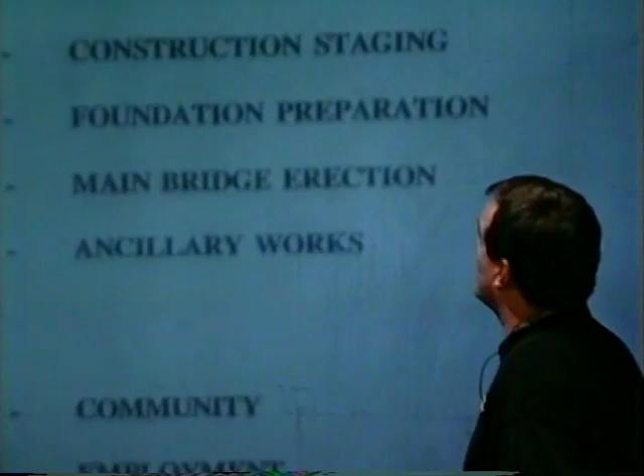In order to do that, I'm going to walk you through the criteria the Government of Canada provided for us that we had to meet in order for this project even to become a reality. I'm going to talk a little bit about our project team, a group of experts, specialists, and established organizations that we brought on board to put the proposal together.

The design solution, how did we get to it? Today we're saying this is the bridge, this is what we're going to build. What did we go through to come up with a bridge, as well as to widen out a tunnel?

The design verification: no matter how many experts you've got on board and how many checks and balances you have, as we've heard at a number of the public meetings, there's also a need to have checks and balances within a group of experts, and I'll walk you through that. Then I'll show you what the design features are of the bridge that we're going to build, that we're going to operate for 35 years, and hand it over to the Government of Canada, in new condition, for them to own and operate it for the remainder of its lifetime, which is a minimum of another 65 years.

A lot of people are interested in how do you build a bridge across that water. People that are used to the area look at the water as being something that is always under changing weather conditions. How are we going to deal with that? How do we deal with where we're going to build it from, the construction staging?

We're going to touch on those things, as well as a key concern for many: how much of that strait we're going to dredge, and what kind of impact we'll have on the valuable fishing community in Northumberland Strait. We'll walk you through how we plan on building this bridge and how it ties into the environmental concerns of where it has to be built, and then touch on the ancillary works associated with the main bridge over water.

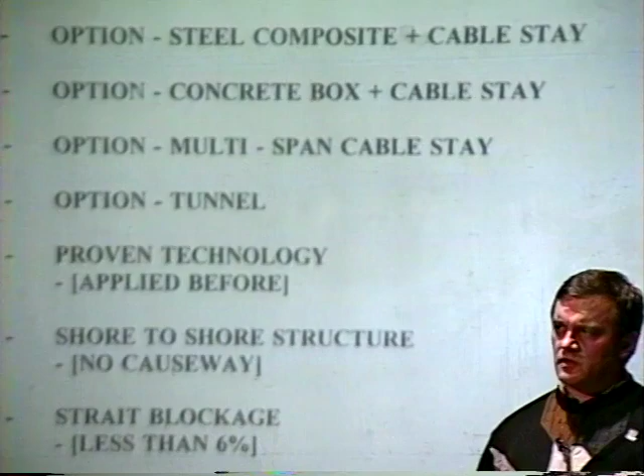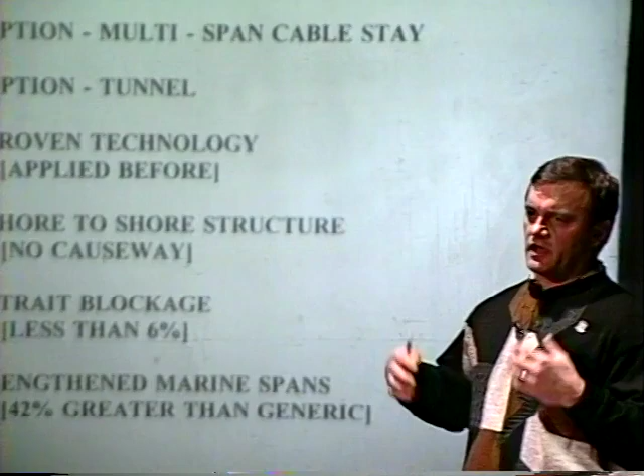In order to accomplish a long life for this project, one of the things you have to concentrate on is building it right the first time. The best way of ensuring that you're going to build it right the first time is to make sure that whatever design solutions you come up with are constructible, that they're easy to build. If they're easy to build, there's a good chance everybody's going to do it right the first time.

In order to come up with that solution you see over on the far screen, we did the following analysis of these options. We did enough preliminary design to understand what our needs were as far as volumes and quantities of material were concerned, and we did a costing on each one of these systems and eliminated all the ones you see on the right here to come up with what we call our best and final solution.

We studied a steel truss and cable stay bridge and priced it out, a steel composite and cable stay bridge, a concrete box and cable stay bridge, a multi-span cable stay bridge, and a tunnel. Those in the audience in the engineering field understand the technical difference between those, but I won't touch on that right now. If anybody has any questions, I'd gladly answer why we excluded the ones on this list and ended up with the bridge on the far left.

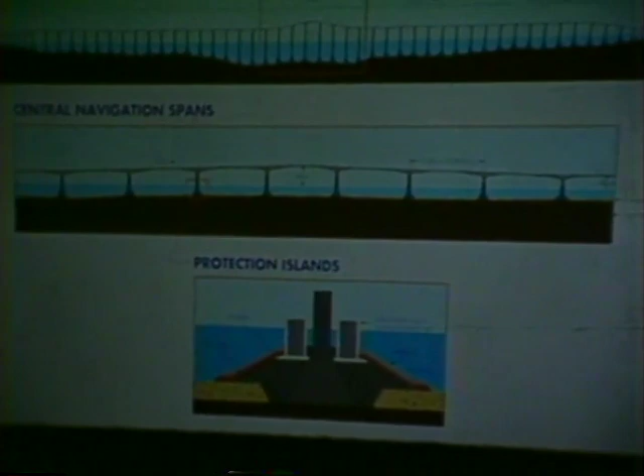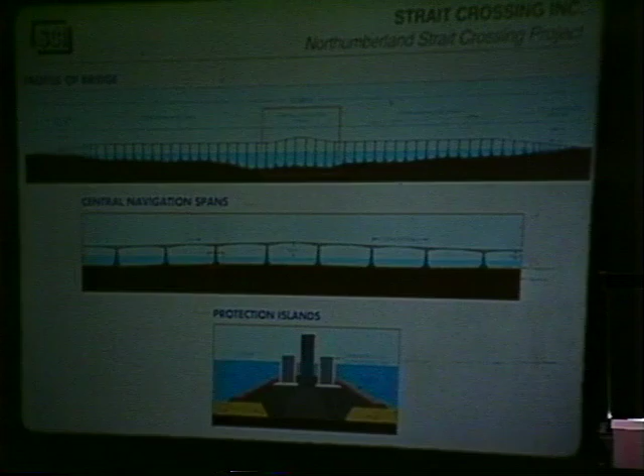Specifically with regard to the tunnel, the same thing: we were the ones that eliminated the tunnel option. Once we evaluated it, it was not the best option for the requirements of the Northumberland Strait. Contrary to what's been stated by a number of media, it was not the government of Canada that excluded the tunnel option as far as our proposal is concerned. We just didn't think it was as good as the solution we came up with.

The solution we came up with is based on proven technology. It's been applied before. The structure goes from the shore of PEI to the shore of New Brunswick.

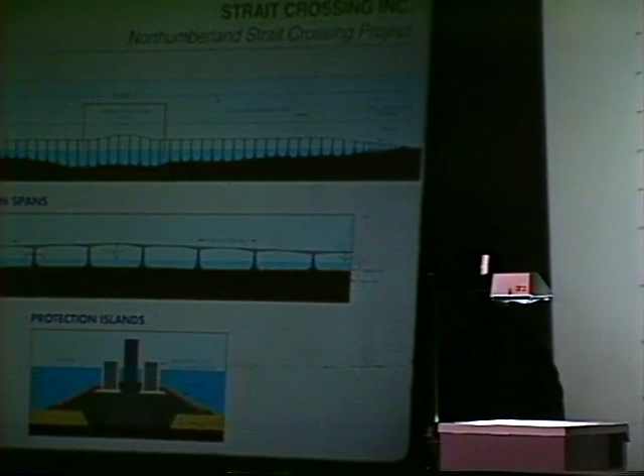There are no causeway sections. Each one of the abutments is on existing land, and the entire bridge is free from or above existing sea levels.

The bridge itself consists of 540 meters of approach bridges on PEI and 1,260 meters of approach bridges on the New Brunswick side. The difference between the approach bridges and what's in between, which we're going to call the main bridge, is that the approach bridges required a different design because the waters are so shallow that the marine lifting equipment we use for the main bridge couldn't get into the approach bridges.

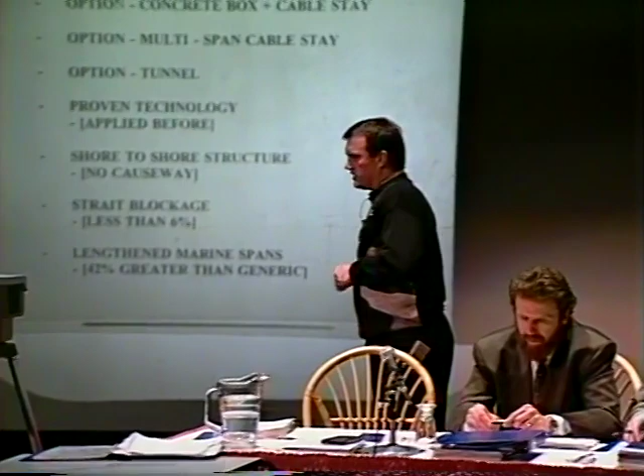The main bridge itself has 44 piers, 44 spans, each one of them 250 meters long, 250 meter span length, which is 42% greater than the span length that the FEARO panel reviewed when they looked at the generic bridge design.

One of FEARO's recommendations, to deal with concerns about ice out, was that although they thought it would be more costly, the span length should be increased. We have that in our final solution. It's 42% greater than the generic bridge.

Of key significance with these large spans is that we're able to reduce the strait blockage at the surface to less than 6%. At the pier foundation, where they sit on the seabed, it goes to 12%. They're cone-shaped foundations, and it increases the overall average to about 7.6% blockage of the strait, which is significantly less than the 10% blockage that the FEARO panel looked at and said would be satisfactory and have no effect on existing currents and tides.

In order to verify for the benefit of all interested parties that the designs are accurate, that they work, that they've been thought through, and that they covered all the requirements of where this bridge is going to live, the following design verification steps have been taken.

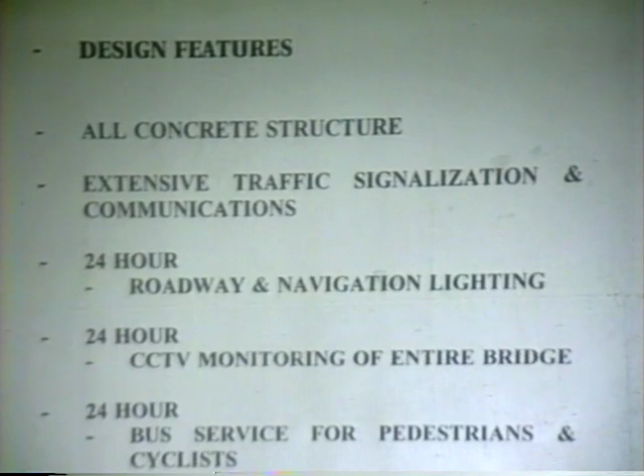The main design features of the bridge are listed on the overhead to your right. First, and very significant, it's an all-concrete structure. The significance of that is it's a low-maintenance structure, and especially in a marine environment, it's one of the best structures you can build from the standpoint of long-term maintenance and longevity. Because the people of Canada are going to take over this bridge 35 years from now and operate it for the rest of its life, the low-maintenance component of the structure is a very important design feature.

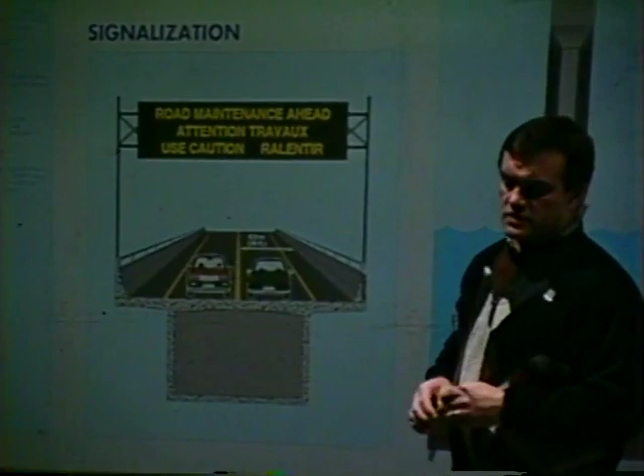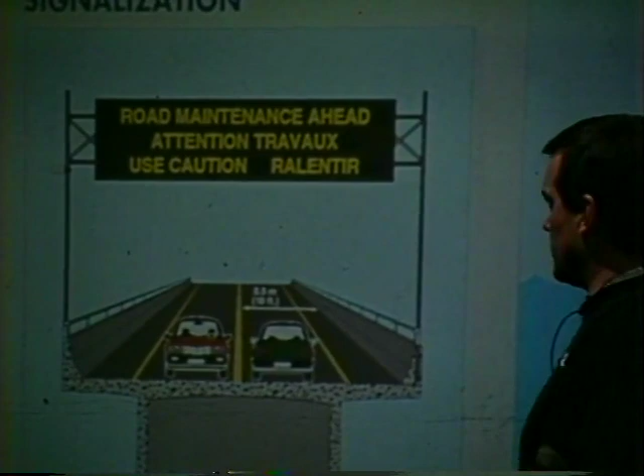Moving over to the people that are the users: the user of the bridge, you and I, are going to approach that bridge and see that there's extensive traffic signalization and communications. As you go across that bridge, you're never going to be alone, because the bridge has traffic signage electronically controlled from a control center stationed in Borden on a 24-hour basis. That control center will advise you what's up ahead of you, whether there's an accident, a stalled car, or the wind speeds occurring at any given time, because the bridge will be under 24-hour wind control.

Should you have a problem like a flat tire, every 500 meters there'll be a telephone along the bridge, so you'll never have to walk more than 250 meters to make a phone call to the emergency control center to send somebody out to help you. In addition, the entire bridge structure is on closed circuit television 24 hours a day, much like a security system in a bank building. That entire road surface is on television, monitored back to the same control center, and somebody's watching you all the time.

Should you have a problem, let's assume you run out of gas, as you're drifting off to the side of the road to pull off the driving lane, the person in the control center is going to know you've got the problem, but at the same time, you know you've got the problem.

And that's important for people to understand that you're never alone on that bridge, and somebody's always watching you. It's not a good place to go parking, or maybe it is a good place to go parking, I don't know.

With regard to pedestrians and cyclists, many people have asked this question in the past, but just to clarify, you are not allowed to walk across the bridge, and you're not allowed to pedal your bike across the bridge. But if you want to get to the other side, whether walking or pedaling your bike, there's a 24-hour bus service that will take you, and your bike, to the other side. The main reason for that, purely safety, we don't want people walking out on that bridge by themselves, so it's one of the requirements — you can't walk across that bridge.

In the event that you want to get to the other side but you don't like driving your car across because you just don't like driving over a bridge, we will, at your request, drive your car and you to the other side for you. That's something that will allow people who don't feel comfortable driving a bridge to get to the other side.

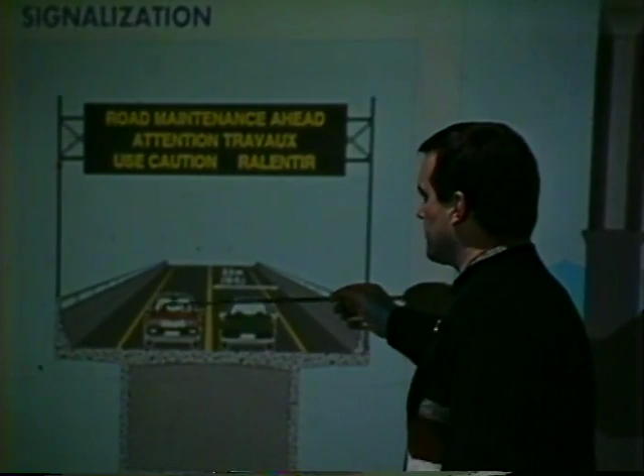Those escort vehicles will have boom safety equipment on them, so that in the event a truck jackknifes and starts leaking, you would put a boom across the front and the back of it, with the front vehicle and the back escort vehicle, and it will control the spillage within the confines of where the truck is spilling the fuel.

The only fuel that would end up in the strait is the small amount that would go through the drainage holes that are there at regular intervals for natural bridge drainage, and those will be manually closed after the accident happens.

We say 'in the unlikely event' because by controlling dangerous goods across that bridge, traveling at very low speeds, approximately 20 kilometers per hour, that particular journey for a vehicle carrying dangerous goods will be the safest journey in the entire highway system in Atlantic Canada. At 20 kilometers an hour, if there's a blowout of the vehicle's tires or something, it's going slow enough that the driver will be able to control the vehicle and not worry about jackknifing.

In that unlikely event that there is an accident with a truck of dangerous goods and it explodes and there's a fire, the fuel that's burning will burn off and not go into the strait. The people will get out of the way naturally, and the emergency vehicles, which are there 24 hours a day dedicated to the bridge, will be called out — they include jaws of life equipment as well as firefighting equipment.

The second part of the reason that this bridge doesn't ice the same way as normal bridges you're used to locally, where they say the bridge deck ices before the pavement ices, is because the bridge being so high above surrounding terrain is not affected by the differential temperature of this surface and the road surface, so it's up in that air high enough that it's relatively immune from that phenomenon. Where it's necessary to de-ice the bridge, de-icing salts will be used.

One area where a lot of people have mentioned concern in the past has been the fear of traveling so high above the water. So what we did for the benefit of everybody is a bridge height comparison, this being the MacKay Bridge in Halifax, this being our main bridge, and this being our navigation channel hump in the bridge that occurs in the middle of the bridge. To put it in perspective, when you're traveling across the MacKay Bridge, you're traveling at 52 meters above the water.

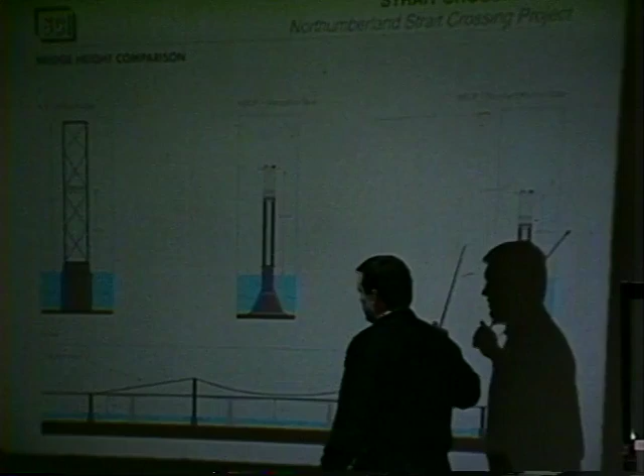Although the towers are higher, where the road surface is, that's 52 meters above the water, compared to when you're driving on the main bridge at 40 meters above the water, so you're actually 12 meters lower to the water surface than you are traveling across the MacKay Bridge.

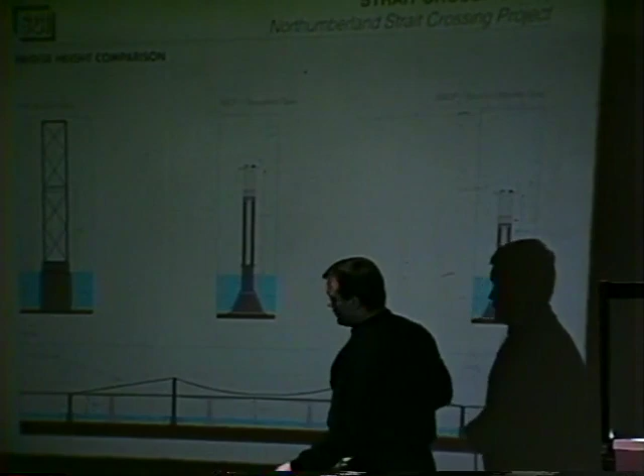However, when you go over the hump in the middle, you're traveling at 64 meters, so you're going to be traveling 12 meters higher than you travel across the MacKay Bridge. Anybody who's traveled across the MacKay Bridge and feels comfortable doing that is not going to notice the difference traveling across this bridge. However, a much more important reason of not seeing the effect of traveling at that height is the following. Go back one slide.

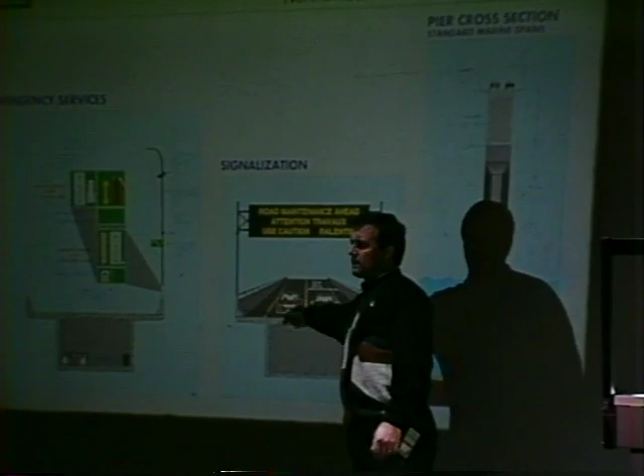For safety reasons, these concrete barriers are continuous along the entire length of the bridge, and they're at a height that if you're in a sports car or small car, you'll just see over the top of them if you look left or right, and you'll be looking into the horizon. If you're in a normal car, you'll see a little more of the horizon, but you won't be seeing the water. Once you get up to the size of a pickup truck and up, you'll be able to see not only the horizon but also the water in the distance.

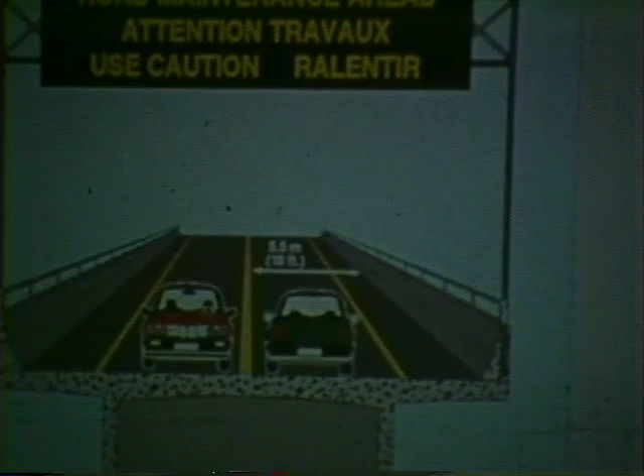Unlike the MacKay Bridge, there are emergency shoulders here, so you're further away from the edge. You're never going to get the feeling like you're looking straight down. So your sight lines, as far as looking left and right while traveling across that bridge in a car, are not very good as far as you can just see the horizon.

However, when you get to the top of the hump in the middle of the bridge, whether you're traveling from here to New Brunswick, you get up to the top and you'll be able to see 180 degrees of the New Brunswick shore from that vantage point as you start coming down the other side. So as long as you're looking ahead, you'll be able to see a very good panoramic view of either New Brunswick or PEI.

We think it's a very user-friendly bridge, and we stress again that you're never going to be alone on that bridge, and that's going to provide you a better safety environment traveling those 13 kilometers than any other 13 kilometers in the existing Atlantic Canada highway system.

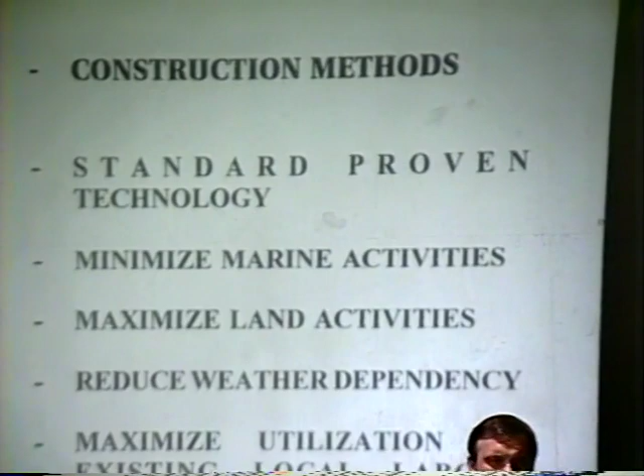A question before I leave drivability: a question came up at one of our meetings about whiteouts—what if you're out there in the winter and you get whiteouts? Simply put, whiteouts happen when the snow lying adjacent to a road surface gets blown up by winds and totally whites out the area in front of you.

Because this bridge is so high above—and this applies to ice too during the winter—the phenomena of whiteouts is going to occur a lot lower than the 40 meters above. So whiteouts in itself is not going to be a problem.

Monitoring has been done on a similar structure, similar in terms of its height, and which also had a causeway section—the Mackinac Bridge in Michigan. They had to close that bridge for whiteouts a few times in its 30-year life to date, but the whiteouts only occurred at the causeway section, because that's where the snow is allowed to pile up on the ice beside the causeway. We're high enough above it that we will not experience a whiteout problem.

Our construction methods are based on standard, proven technology. Everything we're doing up there has been done before. The only difference is some of the pieces are a little bigger than what's been moved around before, but all the work and methods we're using is proven standard technology. Our goal in developing our construction methods was to minimize our marine activities and maximize our land activities, to reduce as much as possible the construction schedule's dependency on weather.

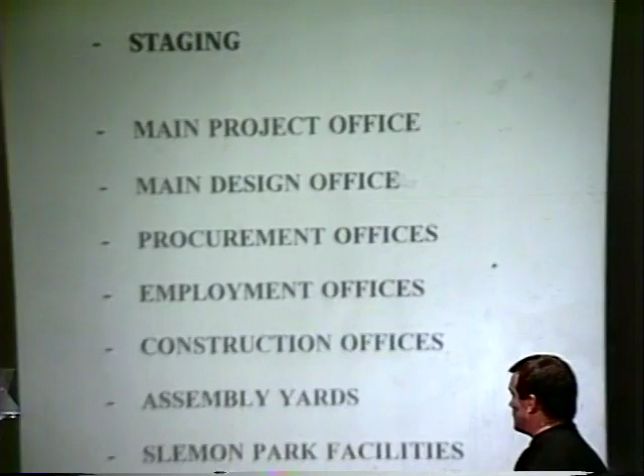The main project office is going to be Charlottetown—that's the corporate head office of Strait Crossing Consortium. The main design office is going to be in Moncton. The procurement and employment office will be duplicated in Moncton as well as in Charlottetown, and further duplicated at the construction office locations in Bayfield and in Borden.

So if you're looking for a job, it'll be relatively easy for you to get a job without having to travel too far. You won't have to travel off the island to apply for a job, and vice versa—somebody applying for a job on the mainland won't have to travel to the island to apply for a job.

With regard to assembly yards, the main assembly yard is going to be located in Borden, as well as another assembly yard at Bayfield. Slemon Park facilities will be used for training purposes, and the hangar facilities will be used for live mock-up training of different forming and rigging systems.

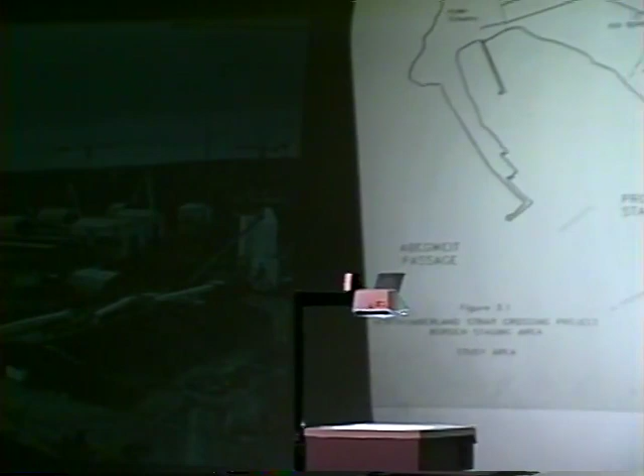For those familiar with the Borden area, this is the existing ferry terminal. That piece of land sticking out to the east, shaded here, is going to become our PEI staging area, the main staging area for construction of the main bridge. It's 150 acres of real estate.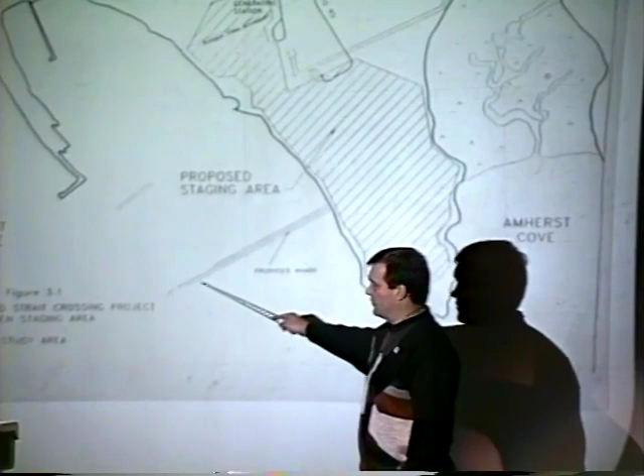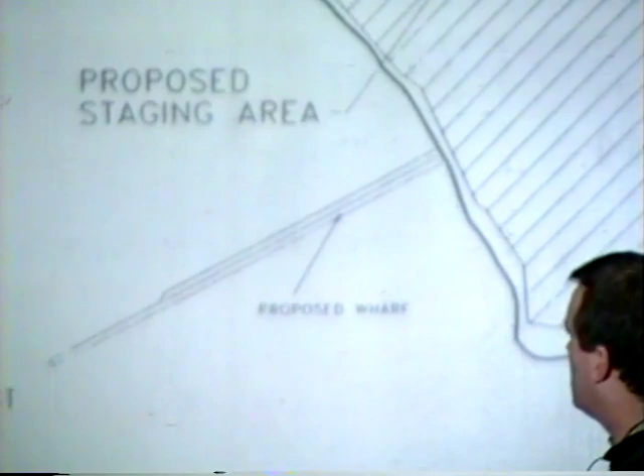We're going to be building a wharf to deep water. That wharf will include the ability to sink submerged barges to the sea bottom, so the barges are sitting on the sea bottom when they get loaded with the bridge components. This particular wharf requires approximately 150,000 cubic meters of rock fill.

Over here is where that wharf takes off into the water. This is an area where we're going to be fabricating what we call the pier bases. The pier shafts will be fabricated in this area. The main bridge girders will be fabricated in that assembly line, and the drop-in spans will be fabricated there, put into storage, and then moved from the storage area out to the barges. We'll talk about that in a moment.

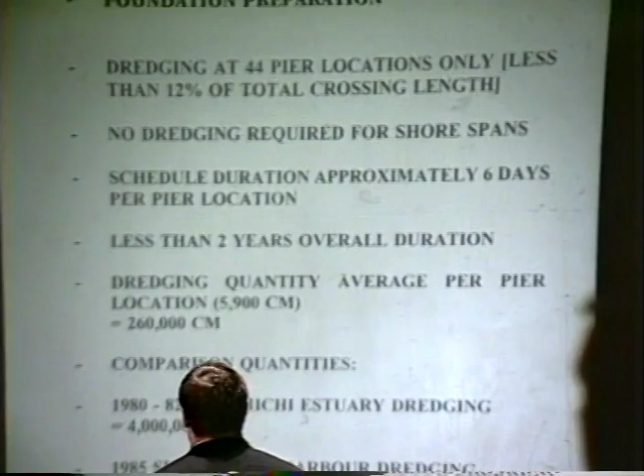In order to prepare the site for the project, for the segments themselves, we've got to prepare the foundations. Foundation preparation is the work that's required underwater and in a marine environment.

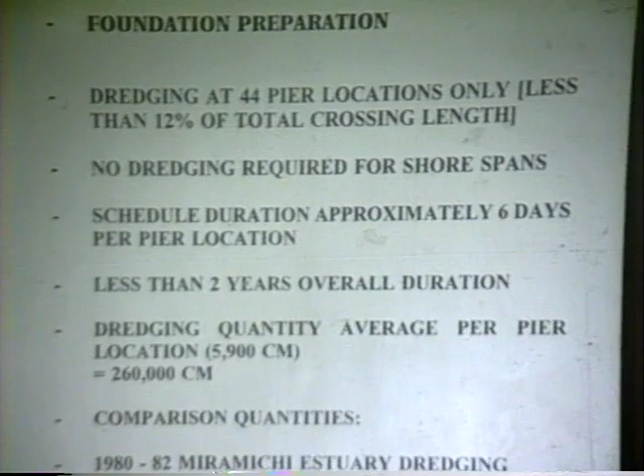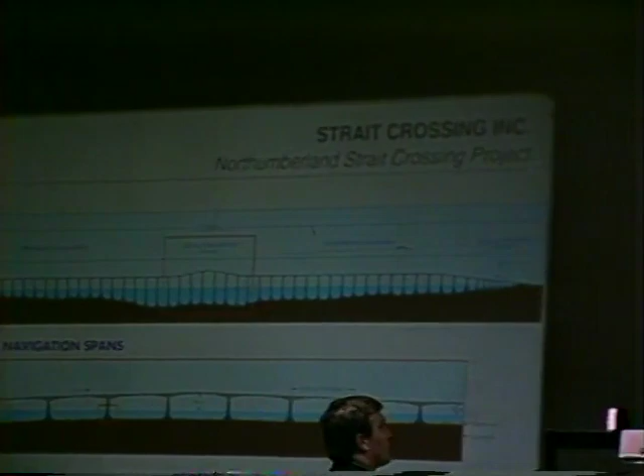In our solution, we need to dredge at only 44 pier locations, which from a distance standpoint represents less than 12% of the total distance across the strait. Our dredging starts at 540 meters offshore and ends up 1,260 meters from the New Brunswick shore. There's no dredging required for our approach bridges, because they're in such shallow water that they're going to be drilled piles rather than gravity-based structures.

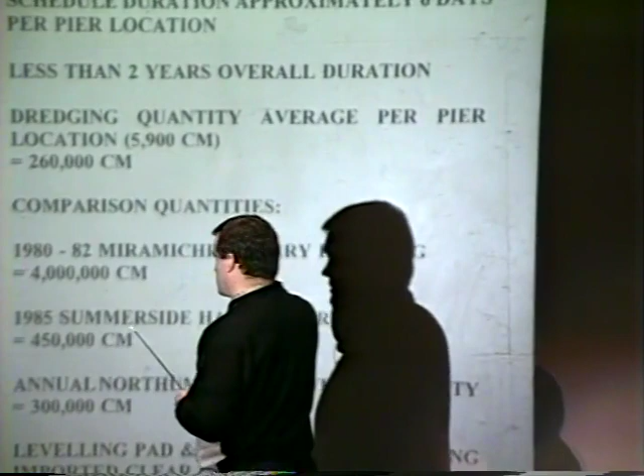The amount of time we expect to spend at each pier location is approximately, on average, 6 days, and we expect to finish the dredging in less than 2 years.

The dredging quantity on average is 5,900 cubic meters per pier location, for a total dredge volume of 260,000 cubic meters. That 260,000 cubic meters compares to the 300,000 cubic meter plus that the FEARO panel report reviewed with regard to the generic bridge, so this is an improvement over that as well.

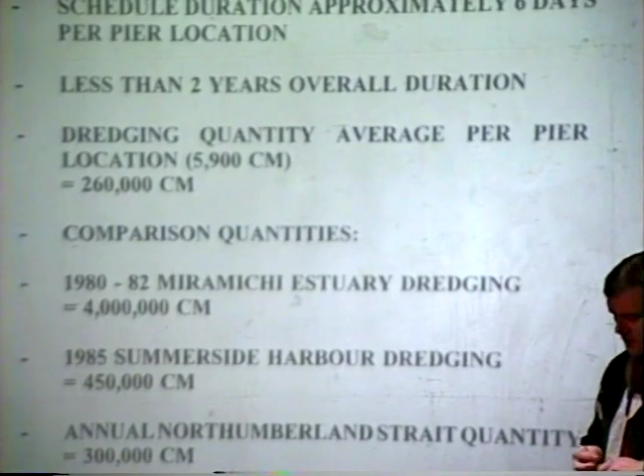The FEARO panel also concluded that with proper dredging techniques, the amount of sediment produced by this small quantity of dredging would not have a harmful effect on the marine environment.

To put 260,000 cubic meters of dredging in perspective, we gave some comparisons of quantities. Between 1980 and 1982, there was 4 million cubic meters of dredging in the Miramichi estuary. In 1985, the Summerside Harbour dredging, which happens on a regular basis, involved 450,000 cubic meters in one marine season alone, compared to our 260,000 over 2 years. The annual Northumberland quantity of maintenance dredging is 300,000 cubic meters per year.

This dredging is not spread over a total of 2 years, it's just a little over 1 year, so we'll be in there for 2 seasons, but not the full 2 seasons.

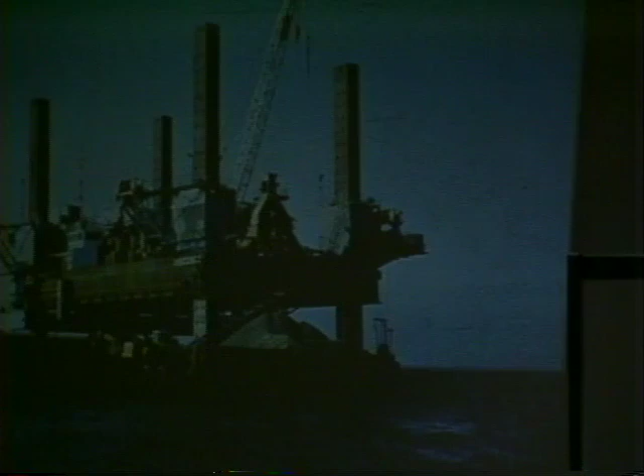Once the pier base is put in, the scour protection goes around it. All that material uses imported clear stone, so it will not have a negative effect on the environment around it.

I spoke earlier about minimizing the number of marine activities and maximizing the amount of land activities.

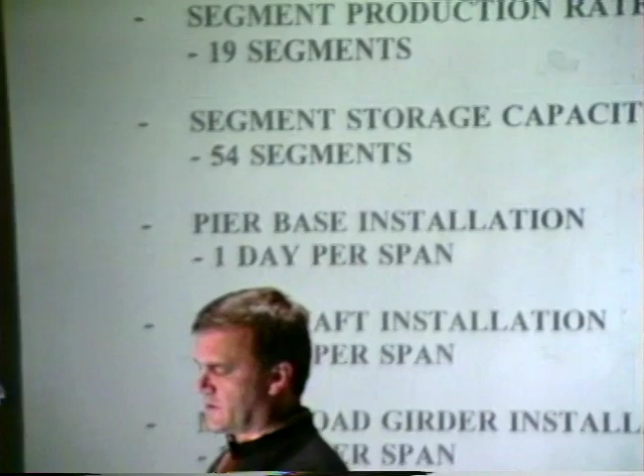The total project requires 427,000 cubic meters of concrete to be cast. With our design and construction method solution, of the total concrete placed on the entire project, approximately 20,000 cubic meters will be placed over the water during construction of the main bridge. A very small quantity of the total will be placed in the marine environment, and that concrete will be in the form of closure pours.

There will be very many pours where the pieces come together, and each one will be a very small quantity. The key significance is that in the unlikely event of a breakage in our concrete pump equipment or what have you, the amount of spillage will be very, very minimal. The concerns raised by people saying that during construction you run a great risk of damaging the natural marine habitat - we believe we've managed against that in the way we've developed our construction methods.

The entire main bridge only consists of a total of 183 bridge components. Those bridge components consist of a pier base, a pier shaft, a main road girder, and a drop-in road girder. I'll describe those in a moment.

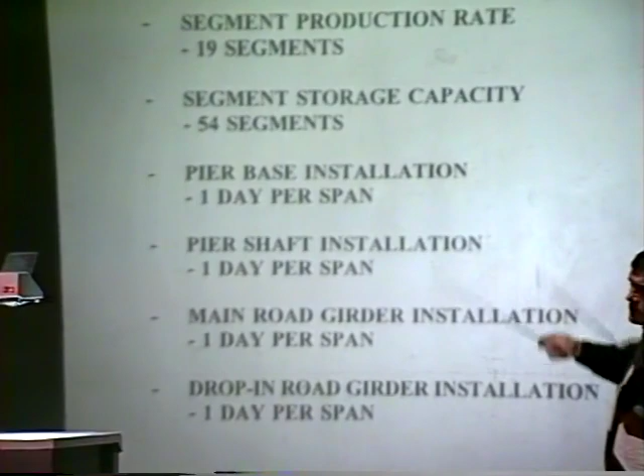To actually place one of those into their final position takes approximately one day. So in theory, you could finish that project in 183 days. Our analysis of existing wind and weather information in Northumberland Strait says that with our equipment, we have between 185 and 188 weather working days on the strait. So the amount of time we're going to spend on the strait equates to one marine season to put up the main bridge. It will not be built in one season because there are a lot of steps that go in between placing one piece and placing the next.

But we don't have the kind of storage capacity to build the entire bridge, store it, and then erect it. It will be built over 2.5 to 3 seasons. The point we want to stress is there's going to be very, very little work happening over the marine environment, and very little chance of affecting it.

At any given time in the staging area, there's going to be 19 segments under construction, and that will be the largest labor force of the entire project - in the production of these 19 segments.

In storage, there'll be storage capacity for 54 segments. So in the unlikely event that we get a long term of bad weather, we'll have sufficient storage capacity so that production of the units can continue while the marine equipment is waiting for better weather.

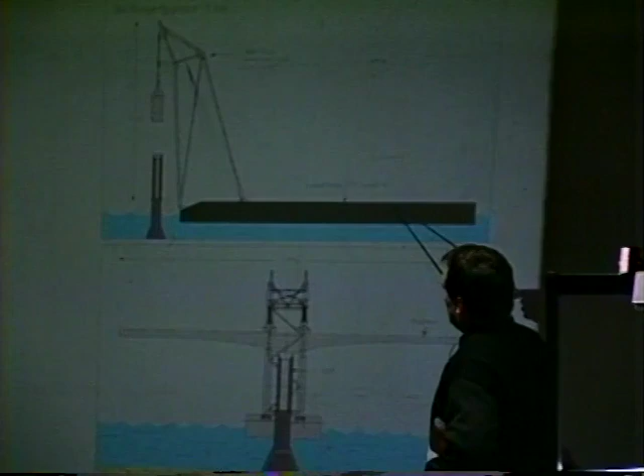Once we get out to where we want to place the pier base, we're going to have a barge or a crane mounted on a barge that's going to turn around and lift the pier base off the barge that brings it out, the load barge, and lower it into the sea.

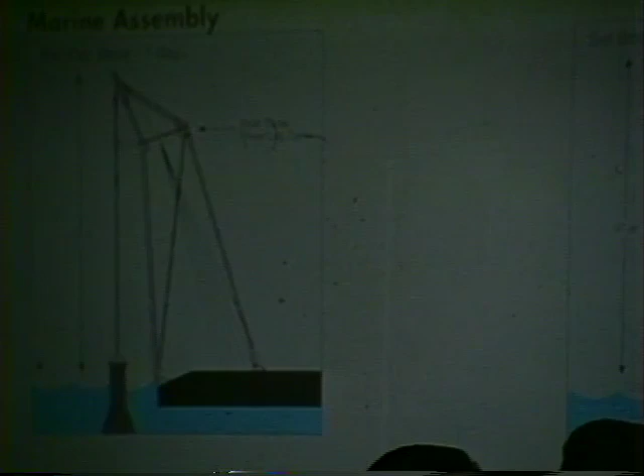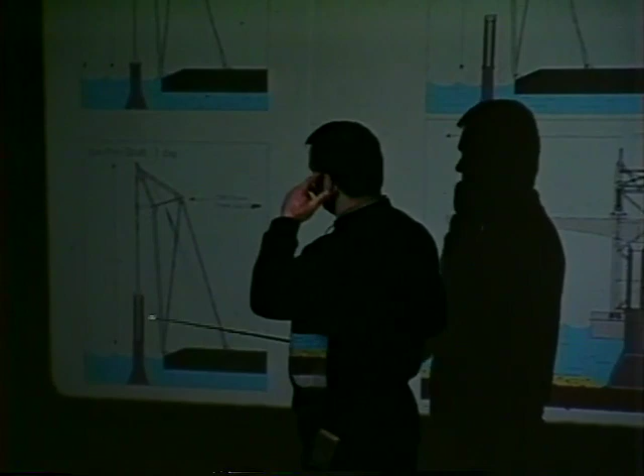These pier bases are of varying height so that when they get placed on the seabed, they'll always be sticking 5 meters out of the water. There'll be varying heights to account for the different sea floor elevation. The maximum height is approximately 150 feet, the equivalent of a 15 or 20-story building, that order of magnitude.

On top of that, we put the pier shaft. At the navigation channels, we have 2 of these to put into place. On top of that, to the top of the shaft, goes what we call the main span girder. The main span girder is 170 meters long, 50 feet high at its deepest point, and weighs 7,600 metric tons.

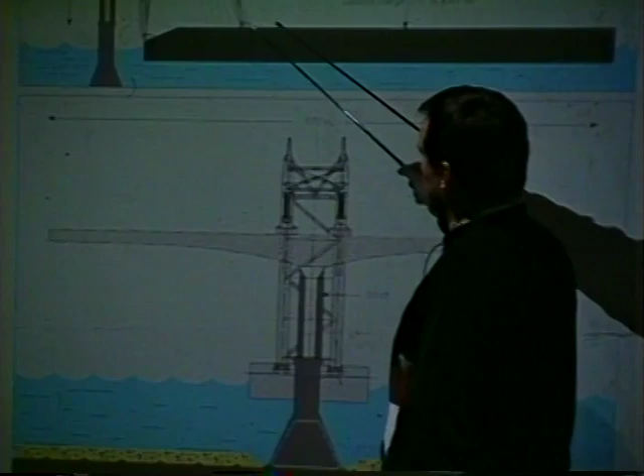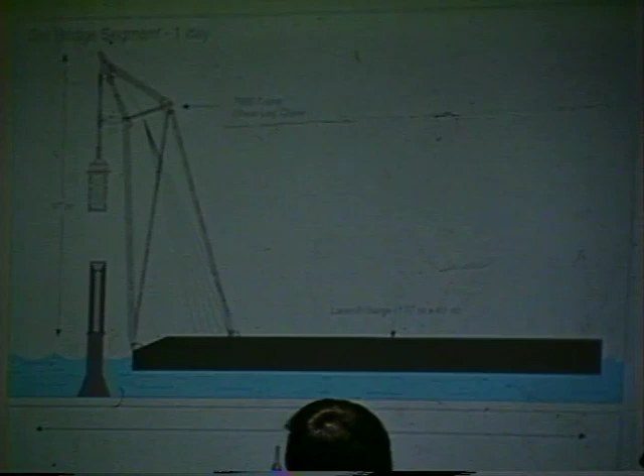This crane, mounted on this barge, from sea level to the top of the crane is the equivalent of a 35-story building. On a clear day, you will see that crane boom from many parts of the island. That crane has the ability to take that 7,600-ton piece of concrete and place it 62 meters in the air on top of the pier shaft.

Because this concrete base, when placed, ends up being 5 meters out of the water, there's no need for any underwater concreting. Again, we have reduced the interface between the marine environment and underwater concreting in that environment.

In conclusion, we think it's a pretty simple method of building a bridge. We're not going to be out there that long, and the things we're going to do out there are very clean as far as running the risk of spills, concrete equipment breaking down, and so on.

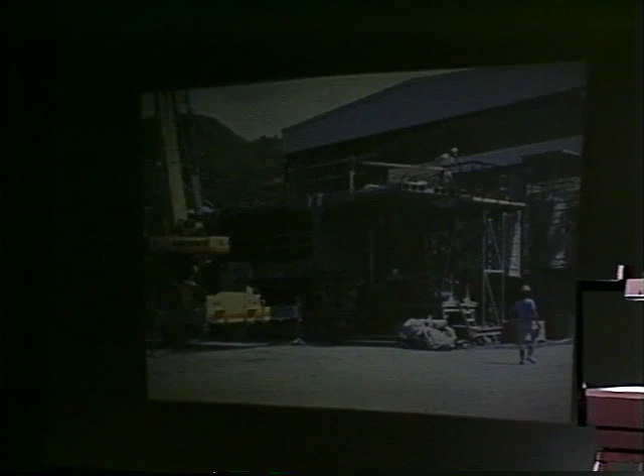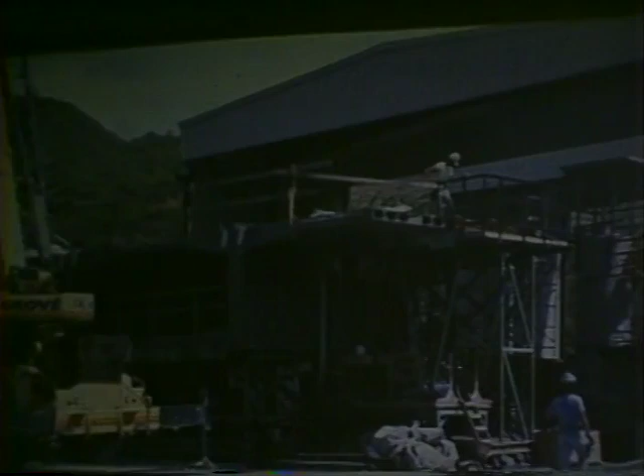Now once the piers are built, these are the units that get cast in the staging area, and then they get lifted onto the bridge from above using a launching truss.

Not working? That's too dark. Okay, sorry.

In addition to that, we're going to be building dangerous goods stations on both sides of the water, toll plazas, administration and maintenance facilities on the PEI side. Another ancillary work is there's an option to rebuild or replace the Hillsborough Bridge, which may be exercised by the government of PEI.

So what does all that mean and what impacts does it have on the community? Studies have been done and shown that in the long term there's going to be increased employment opportunities.

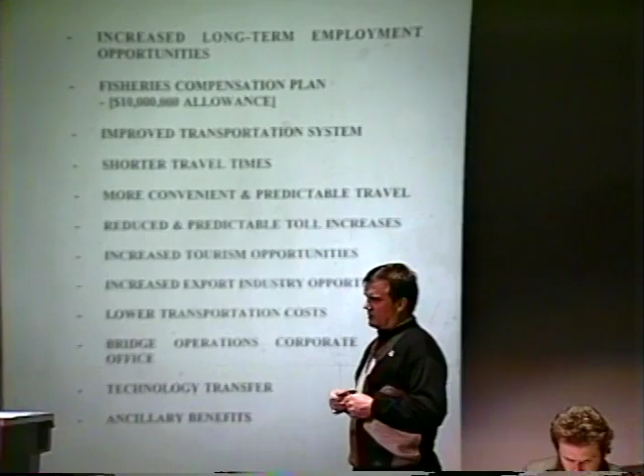The fishery community is going to be compensated through what's called the Fisheries Compensation Plan, administered by the Fishery Liaison Committee, a committee chaired by the Government of Canada and made up of representation from the fishing industry in the Northumberland Strait.

We're going to end up with a more improved transportation system, and that's going to result in lower transportation costs. It's going to result in increased export opportunities. It'll increase the size of the market area available to PEI businesses to compete in, and it'll come up with more convenient and predictable travel as a 24-hour system.

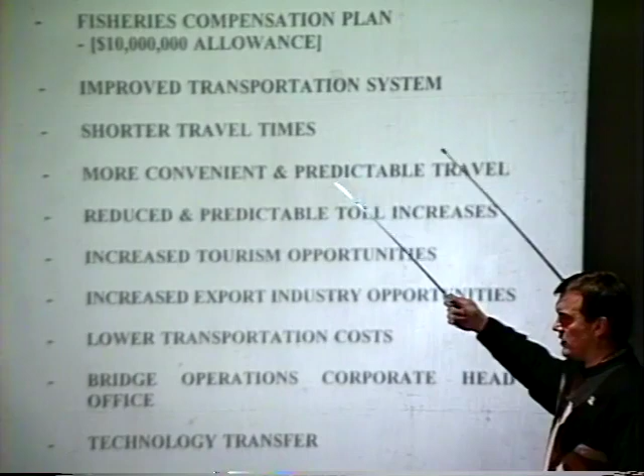We walk you through how you're going to get across that bridge, and we're going to end up with new corporate head offices for the bridge operating company in Borden. That's going to add to the tax base of the town of Borden. We're also going to end up with substantial transfers of technology during the life of the construction, as well as after the construction period is over. We'll be touching on that more during the question and answer period.

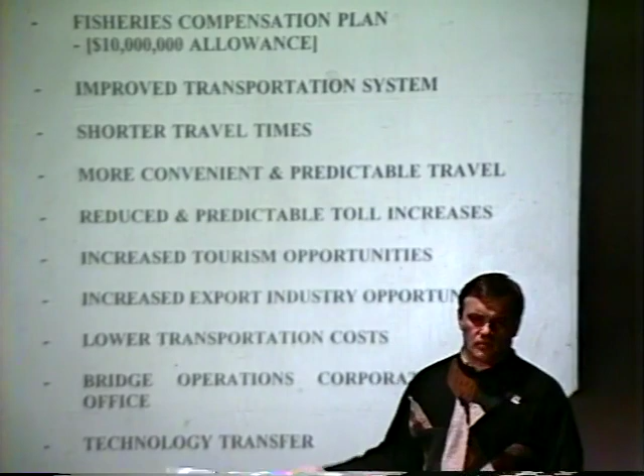Some ancillary benefits that are going to accrue to the community are things like, when we're in Borden, we're going to require a consistent water supply for our needs. At the end of construction, the facilities and infrastructure we've built could be available to the town of Borden if they so choose. There's a series of those kinds of benefits available as spin-offs from this project.

One of the key things is there's going to be reduced and predictable toll increases. According to our contract with the Government of Canada, the toll increases are fixed based on the existing ferry toll rates at one year before the bridge opens, and they're going to be allowed to grow at no greater than three-quarters of the consumer price index. Our toll revenue formula will be like a regulated utility, and as a result, it'll be more predictable.

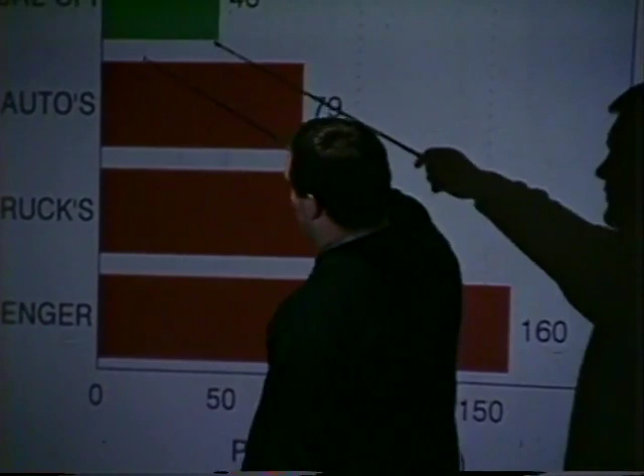If that same formula had been in existence for the last 10 years, between 1982 and 1992, our toll formula would have increased toll rates by 34% during that time period. The consumer price index actually grew by 46%. However, what you see in red here is autos, or the toll rates for autos on the existing ferry system, increased by 79%. Truck toll rates increased by 93%, and passenger rates increased by 160%. In total, over that 10-year period, crossing that ferry cost 107% more in 1992 than in 1982, compared with 34% if the fixed link formula had been in place.

From a dollars and cents standpoint, what does that mean? The users of the ferry system during that 10-year period would have saved $14 million. You can see each year how the savings increase, and if you extend that graph, it's only going to get worse with the existing toll rates on the ferry system.

The impacts on employment are obvious. There's going to be in excess of 1,000 new jobs created during construction, jobs that the large experienced labor force in Atlantic Canada can supply. They're going to be jobs you're all familiar with: jobs for laborers, carpenters, equipment operators, marine crews, specialty trades, engineers, and managers.

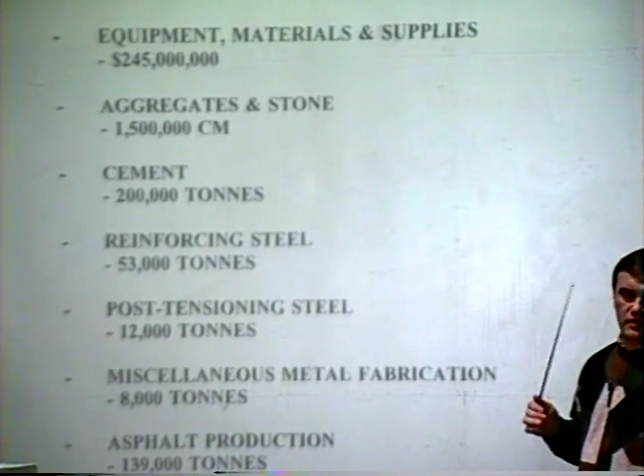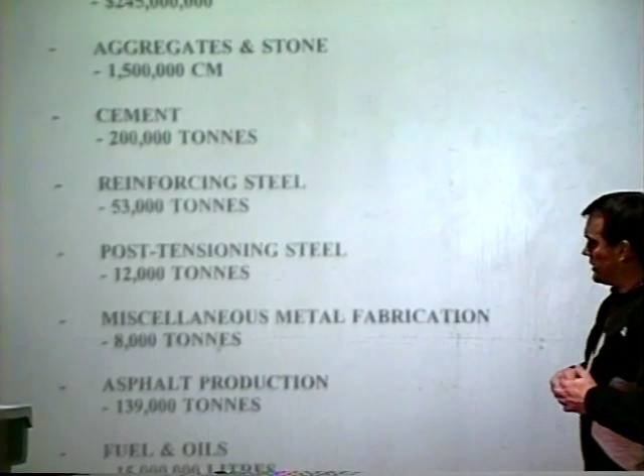The type of purchases we're going to be making: we'll require over 1.5 million cubic meters of aggregates and stone, not including the aggregates necessary for the production of 427,000 cubic meters of concrete. We're looking at 200,000 tons of cement, 53,000 tons of reinforcing steel, 12,000 tons of post-tensioning steel, 8,000 tons of miscellaneous metals, 139,000 tons of asphalt, and we're going to use in excess of 15 million liters of fuel to build the bridge. Now, those are what we call the big ticket items, but in addition to those, there are many, many other things included.

Included in the $245 million, there's many things that are non-construction related directly, but indirectly they're business related. One of the things we're going to require is in excess of about 150 computers. Those computers are going to require maintenance and training of people, so there's going to be the ability for training businesses to get business on the fixed link, maintaining computers.

We're going to require over 100 pickup trucks. We're going to turn around and, like everybody else, require haircuts and what have you. So it goes all the way down to everyday businesses are going to have the opportunity to participate while this construction is going on.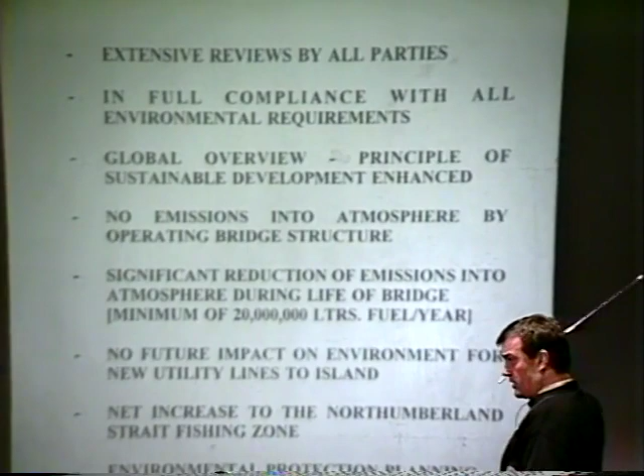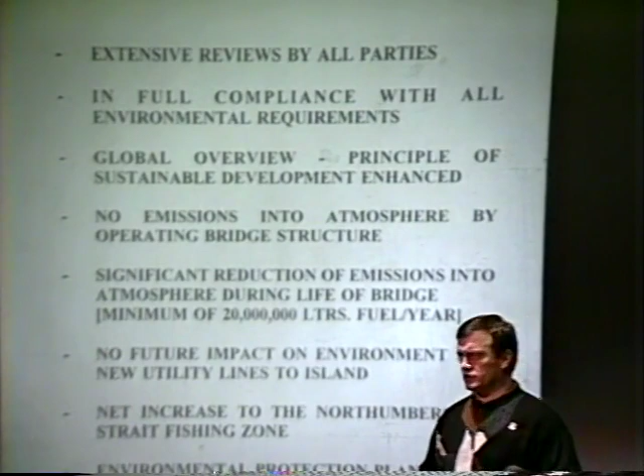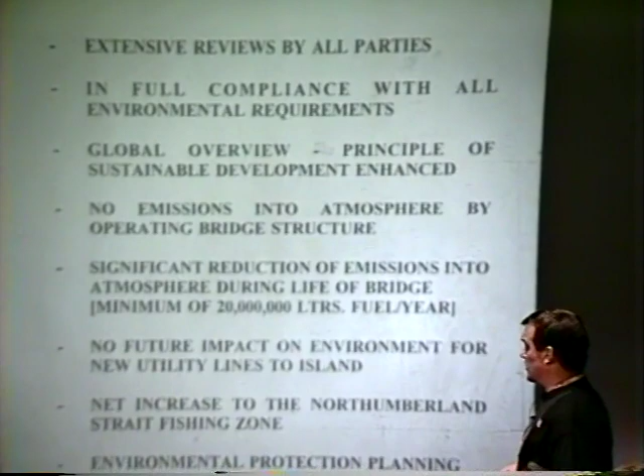The impacts on the environment - much has been talked about, and there isn't a common consensus on it, no question about it. With regard to the extensive reviews by all parties, from our standpoint, we've followed this project since 1987. We believe there's been extensive reviews by all parties of the environmental issues. We've stated that before, and we produced a proposal and a scheme and a solution that is in full compliance with all environmental requirements and the various steps we have to go through from here on to get through the final environmental review process, as Jeff will talk about later, and it'll be in full compliance with all environmental requirements.

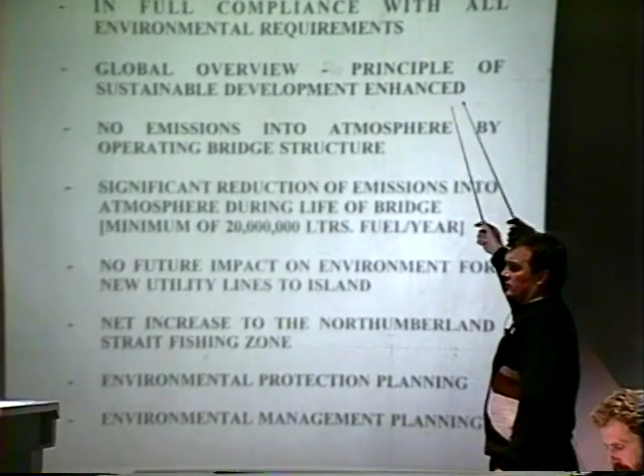From a global standpoint, we think we're going to help the global environment a bit. We're going to reduce the amount of fuel emissions that go into the atmosphere once we eliminate having to run the ferries.

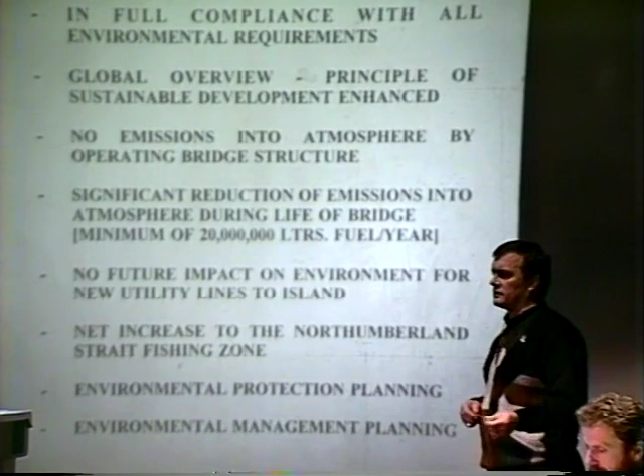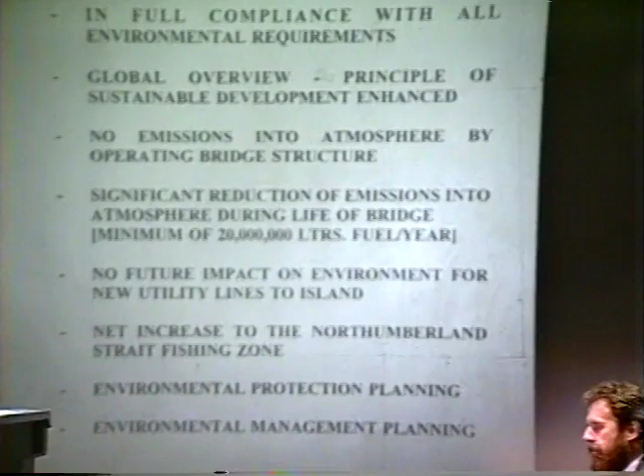As well, there's going to be no future impact on the environment for new utility lines to the island. Inside the bridge structure is included a utilidor, so that future utilities required to come over to the island will be built inside the concrete box of the bridge, and that utilidor is going to replace the need to put any more utilities on the sea bottom.

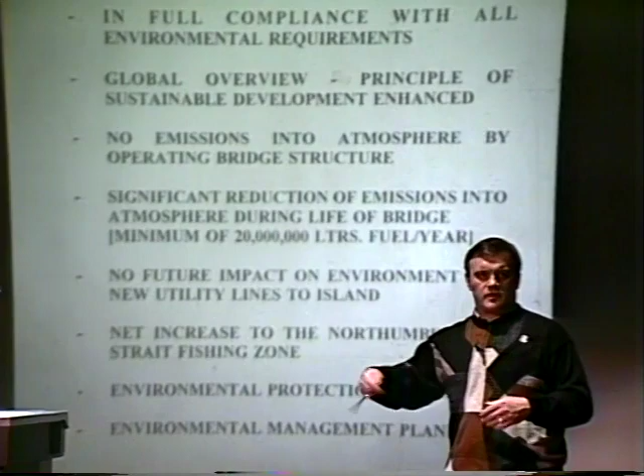Once the ferry system disappears, the real estate that the ferry runs on, that exclusion zone, will become available to fishermen in the area on a full-time basis. We understand there's restrictions on certain types of fishing, not others, but all you got to worry about is making sure you don't hit the ferry while you're fishing there, so this is going to be a plus for the fishing community.

And in order to make all of that happen, the construction I just walked you through, and to make it happen in an environmentally safe way and to deal with the environmental concerns of the people actually doing the building, Jeff is going to turn around and present the environmental management plan highlights.

I would just like to summarize, though, that I know it's been a long story, and I don't know how long I've been talking. I always get heck for that, but it took over 5.5 years of a lot of people's time analyzing a lot of studies that were done before we, as a consortium, even got involved, to put together what we tried to summarize or highlight for you here today.

What I'd like to share with you is that what you've seen today is the tip of an iceberg of the amount of information that was analyzed, developed by a lot of experts to get to where we are today. We feel fully confident that we have a very good solution, well thought out.

And if there was one advantage that all these delays have created, it's allowed us the opportunity to keep looking back at it, and looking back at it, and looking back at it. But I think we're in a position now where we can confidently say we've listened to the concerns that people have raised in writing, in reports, even in the media, and we've taken those concerns and incorporated them into our design and technical solution, and we're ready to go to work.

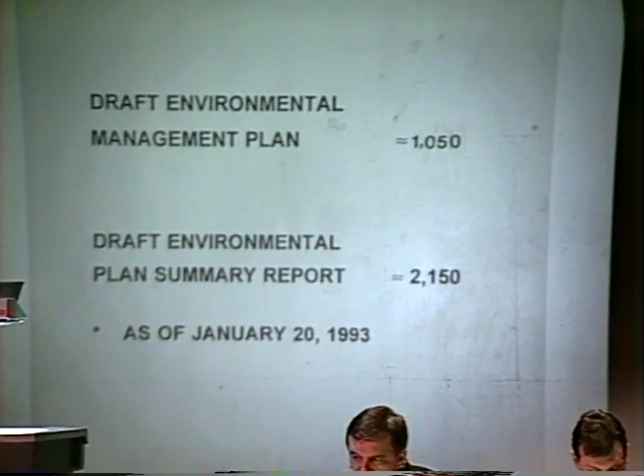To give some idea of the extent of distribution of the document through a number of different channels, we have distributed over 1,000 draft environmental management plans - quite a thick document for those who've seen it. There's a reference copy at the table at the back, and if you give us your address, we'll send one to you in the post tomorrow. We also have a summary document which is shorter, and we distributed over 2,000 of those, totaling over 3,000 documents distributed.

Just one last point on our consultation - earlier this week we talked to our 1-800 number person, and she tells us we've had about 550 calls, resulting in 910 documents being distributed just through that mechanism alone.

SCI recognizes that after this round of consultation, the exchange of information does not stop - it must not stop. To develop an effective management plan that lives through the life of the project, we have to have continuous dialogue with various interest groups, fishermen, naturalists, and so on, to make sure that exchange is consistent through the whole project.

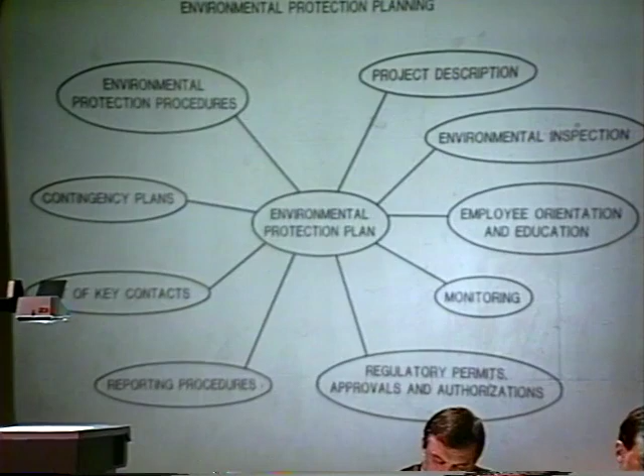If I can give you an example, it covers a number of different things. Let's take, for example, there's a lot of concern in the marine environment about various species of fish and shellfish, and a concern like the timing of construction in relation to something like herring spawning. One way to minimize any possible effects on herring spawning would be to try and schedule your work so that you're away from the herring spawning beds. That would be incorporated in the planning and also articulated as a measure in the environmental protection plan.

Contingency planning involves a wide range of things. It can cover things like what if you come upon historic or archaeological resources. What do you do? How do you deal with that? Who do you contact? What are the procedures to follow to ensure that they're not disturbed before an archaeologist can assess the situation? It can range to things like forest fire protection planning, as well as the more obvious situations, like if you had a loss of fuel and had to clean it up, there'd be plans in place for that sort of thing.

Related to that is knowing who the key people are, not only on the job site from an environmental perspective, but also the regulatory authorities or other people who have environmental knowledge. In the protection plan, all those people are identified for quick reference in case of the need to talk to people. Reporting procedures are really important.

If you've ever been on a construction site, sometimes nobody seems to know what's going on. From an environmental perspective, if you're going to build a bridge and effectively protect the environment, you have to make sure everybody knows what's going on from an environmental perspective. That means you have to have reporting procedures established, and you also have to educate your employees on environmental affairs.

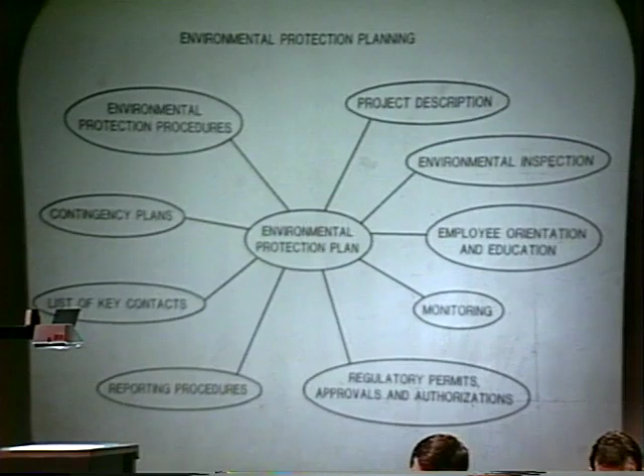That will involve viewing a general video that everyone will see regarding the receiving environment and the sensitivities and concerns, the fact that there is an environmental protection plan, and that every single employee has environmental responsibilities. Following that, depending on their work area or job, the environmental staff will meet with those people and brief them fully on their responsibilities under the environmental protection plan for their work area.

As well, the regulatory permits, approvals, and authorizations that have to be obtained under the various environmental legislation will be integrated into the environmental protection plans and planning, forming an integrated protection planning procedure.

The last thing I wanted to mention regarding protection plans is that SCI will have a dedicated environmental staff on the site. When I mean dedicated, that means their sole job will be to deal with environmental affairs. They will go around the site and inspect activities. They will interpret the environmental protection procedures for the workers.

They will also offer advice when something comes up that maybe we hadn't planned on, and just generally keep an eye out for making sure that things happen the way that we want them to and the way we've committed to undertake them, both in our own planning and also under the various regulations and permits.

Let me give you some idea of how we coordinate this protection planning. If you look at the draft environmental management plan, the last half of that thick document is what we call a generic environmental protection plan. During the planning phase of the project, we prepared this document, and it is really the standard environmental protection plan procedures that will apply to most of the job site or all of the job site.

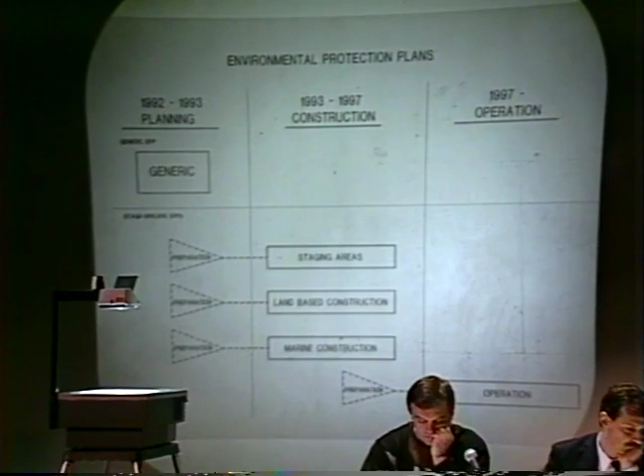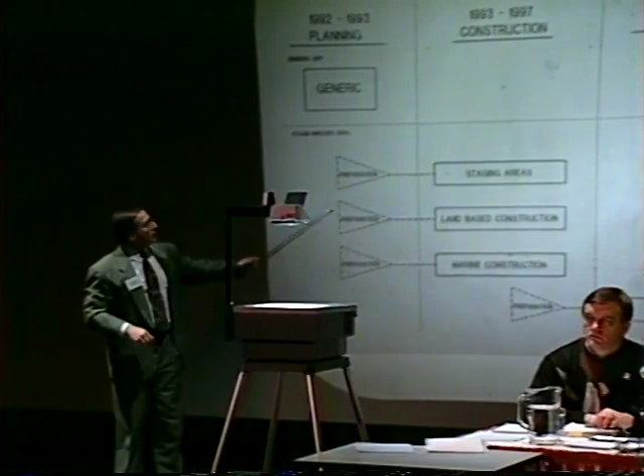We have that out for review now. Based on that, and also our interpretation of the work activities and how they relate to the environment in the key work areas, we are developing right now what we call stage-specific environmental protection plans. Those three work areas for the construction phase are the staging areas, the land-based construction like the approach roads and abutments, and the marine construction.

The reason we're doing that is because workers who work in those areas tend to work only in those areas. There's not a lot of interaction between them, and we want to focus their attention on only those things that they need to know regarding their areas. We also want to be in as much detail as possible discussing and presenting those facts.

As well, towards the end of construction, we're going to develop an operational environmental protection plan, and that will deal with all the environmental affairs of operating the bridge in an appropriate way, particularly things like contingency planning for unexpected environmental accidents.

I'm going to shift gears now and start talking about monitoring. You may recall from the umbrella environmental management plan that was one of the key points. This is the scientific aspect of dealing with the environmental affairs of a project like this. I think the best way to explain what environmental effects monitoring is, is to tell you why we would do these studies. There are 4 key points which are all related to each other that are the reasons for undertaking it.

The first one is to evaluate effectiveness of protection measures. I mentioned in the protection procedures we have a number of measures that we're going to implement. We want to make sure these have been effective, that they continue to be effective. If not, we want some kind of early warning of their lack of effectiveness, and that's the second point. If there are any undesirable changes in the environment, we want to monitor it and have feedback to complete that loop so we can change our plans and come up with new ways to deal with that problem, to ensure we effectively mitigate any potential effects.

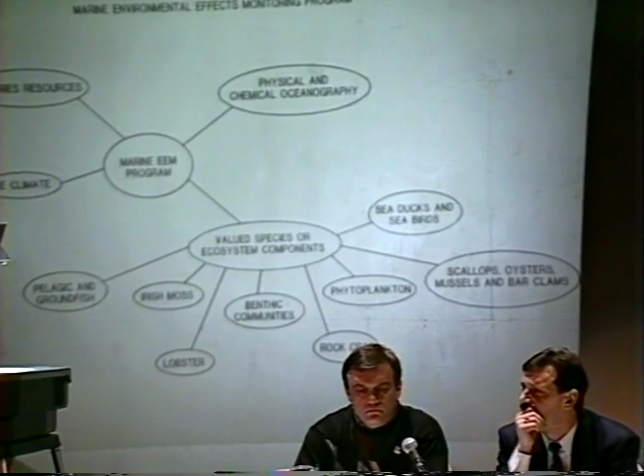Everything from pelagic and groundfish like herring and mackerel and so on, to things like phytoplankton, which are the small one-cell plants that are at the bottom of the food chain, or an important component of the food chain. And you'll see a number of other species, like commercial species such as scallops and oysters, and some which aren't necessarily commercial but are of environmental or ecological interest.

Before I close, I want to review what's happening with our environmental planning from a review process. Many of you are well aware that there was a federal panel, and they reviewed what was called a generic bridge concept, or bridge concept assessment. What we've done is compared our specific bridge proposal to that generic proposal, and identified the differences between our proposed project and the generic one.

We've also provided more details on some of the things that were not available to the panel when they did their review. We've included that information, that comparison, and those details in an environmental component report. That report contains an evaluation of the importance of any of the differences we've identified between our proposal and that which was assessed during the federal panel review.

In particular, the panel did not know very much about the specific proposals of the staging areas. So we give quite a lot of detail on our Borden and Bayfield proposed staging areas, and we evaluate those activities in relation to the surrounding environment in those areas. We've developed and outlined protection measures for inclusion in the environmental protection plans, and lastly, we've made suggestions regarding monitoring for inclusion in our environmental effects monitoring program.

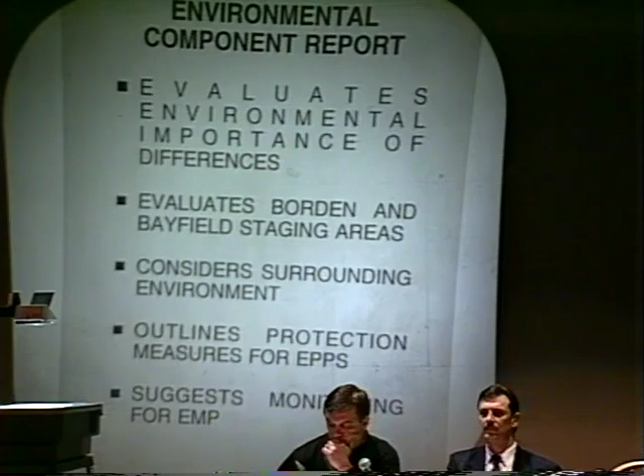The reason why we've done all this exercise is to help us plan, but also we have some regulatory requirements that are relevant I want to touch on. In both Prince Edward Island and New Brunswick, there is environmental impact assessment legislation. In Prince Edward Island, it's the Environmental Protection Act, and under that legislation in both provinces, a project of this nature is required to be registered for consideration by the regulatory authorities.

We have prepared registration information in response to the requirements of that legislation, and we provided with that registration a package of information which includes the environmental component report, and as well, of course, the draft environmental management plan.

At the same time, the environmental component report has been provided to the Environment Committee I mentioned earlier, which was struck by Public Works Canada, the group responsible for reviewing and accepting the environmental management plan, and we provided that to them in support of their evaluation of our draft environmental management plan.

That's my last slide, but just in conclusion, I'd like to state that dealing with environmental affairs, particularly on the construction site, but also on a bridge operating, the actual environmental protection is a very straightforward exercise. It's very practical and pragmatic. It's very much like construction. Paul's construction people break down the activities and plan things out in a stepwise fashion to build a bridge, and the environmental protection has to be developed in the same sort of way.